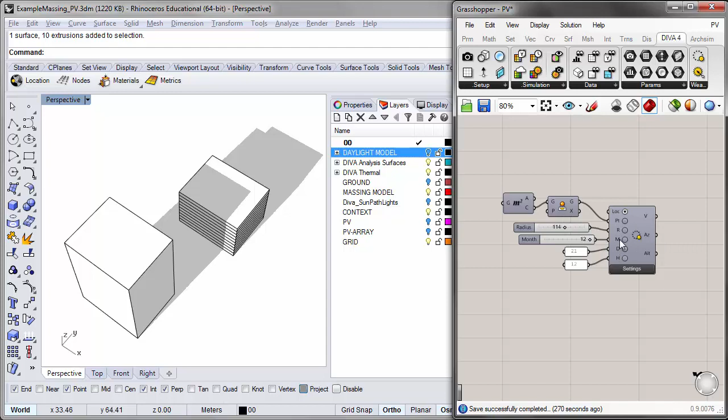We're using the example office Rhino file with the addition of a context building situated to the south of our example office building, which casts a shadow on the roof. We can visualize that shadow using the sun path component you can refer back to in the previous tutorial.

We're showing the worst case scenario shadow being cast at 12 p.m. on December 21st. We'll use the radiation map to show the incident solar radiation falling on our rooftop to get a more quantitative evaluation of where to place a PV panel on that roof.

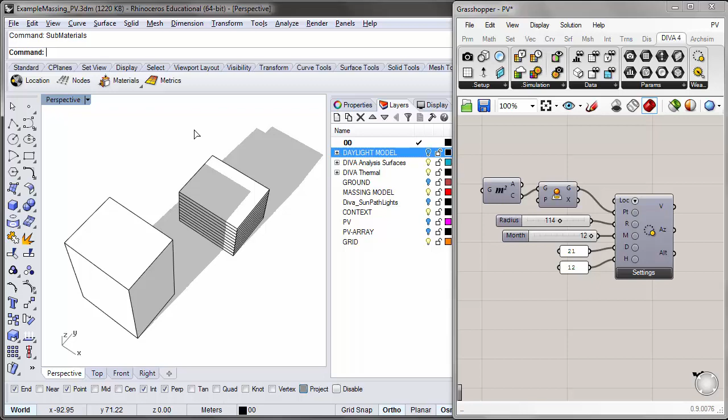We are using the Diva material assignments for this tutorial in Rhino, so you have to have this file set up by setting a location and assigning the materials in the scene. You'll see I already have materials assigned for our context building and for the massing model, which contains our example office, as well as a couple of layers called PV and PV array, which I'll explain further on.

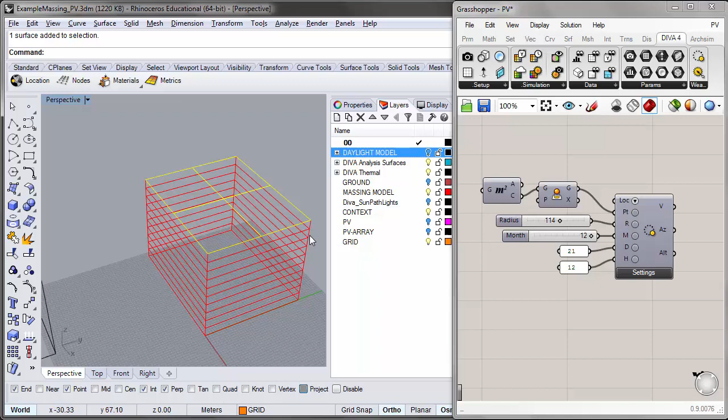This contains the geometry of the photovoltaic panels that we will be testing. I'll switch over to wireframe mode, and you'll see there's a surface modeled on top of our example office building that we'll use to reference for our analysis grid, but we won't be including this in the simulation.

Now to begin, I will place the radiation map component onto the canvas, located here. This component will simulate the total solar radiation falling on a surface, or any kind of input surface, for a given time period.

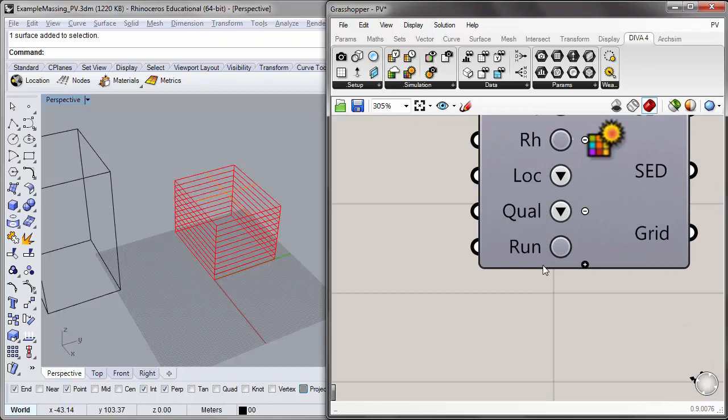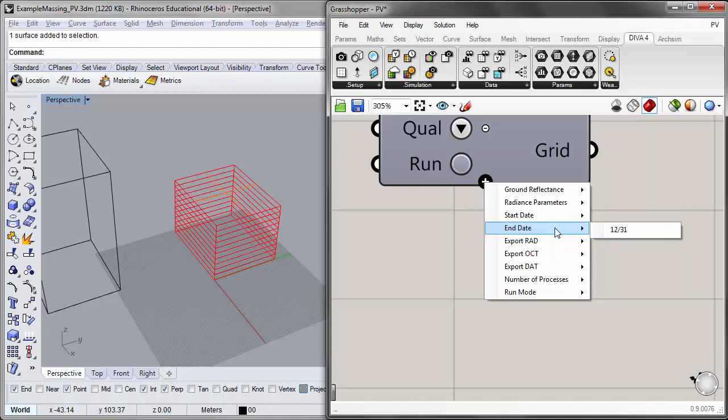That time period can be specified if we zoom in on the hidden inputs. If I press the plus, there's a list of hidden inputs, one of them being the start date, defaulting at January 1st, and an end date input at December 31st. We can override these if we wanted a specific time period, like summer, but for now we want the annual solar radiation incident on our surfaces, so we'll leave the defaults.

We'll give this simulation a name. I'll call it PV, and I'll plug that in here.

Now we need to tell our grasshopper component which surfaces to analyze for solar radiation, for the radiation map. So we'll use the daylight grid input, which is what we used for our annual simulations in previous tutorials.

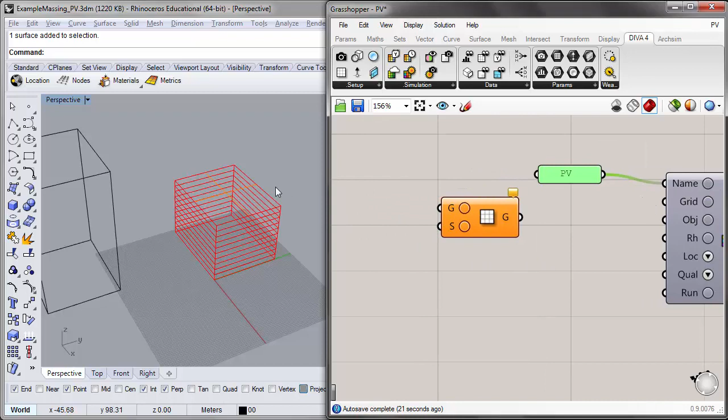For the geometry input, I'm going to reference that surface we want to use for our grid here in the Rhino viewport. I'll place a BREP container onto the canvas and set this surface, which is on the grid layer, as our reference surface for our analysis grid.

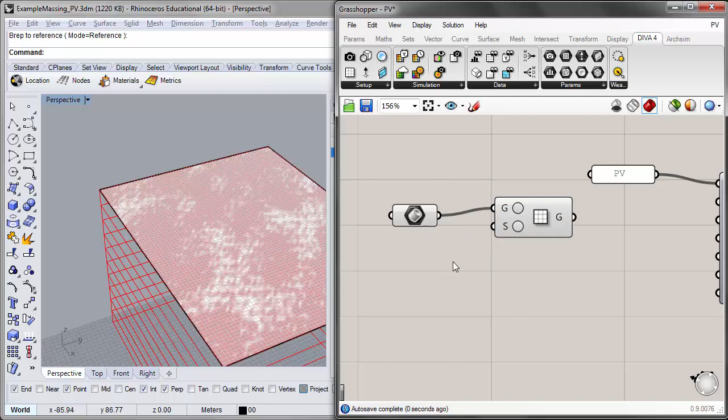And for the spacing, I'll go ahead and leave the default spacing, which is 0.45 meters. I'll plug the grid output into the grid input.

Now for the objects in our scene, as I mentioned, we'll be using the Rhino scene for our simulation, so we won't need to define any additional objects using grasshopper components, leaving this OBJ input blank. For the Rhino scene, I want to include the Rhino scene object, so I'll put a Boolean toggle onto the canvas and set that to true, so now we're including our context object as well as the example office.

For the location, I'm going to keep the default Boston Logan Airport EPW file, and for the quality settings, I'll also use the default low setting. I will place a button on the canvas to run.

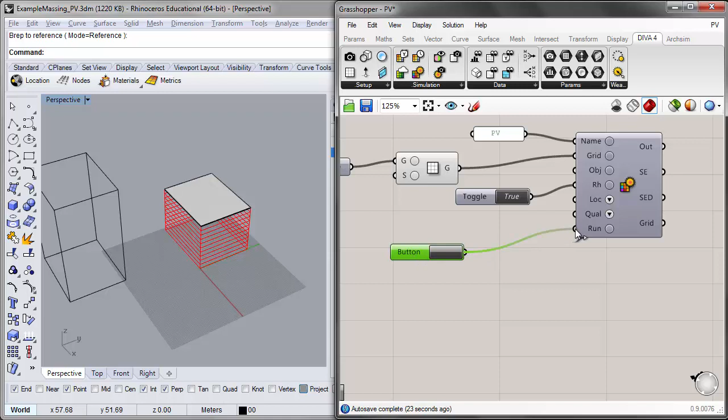So the objective of this first simulation is to just see the solar radiation incident on this roof surface for the entire year, and we'll try to focus in on the effect of overshadowing from this context building to the south.

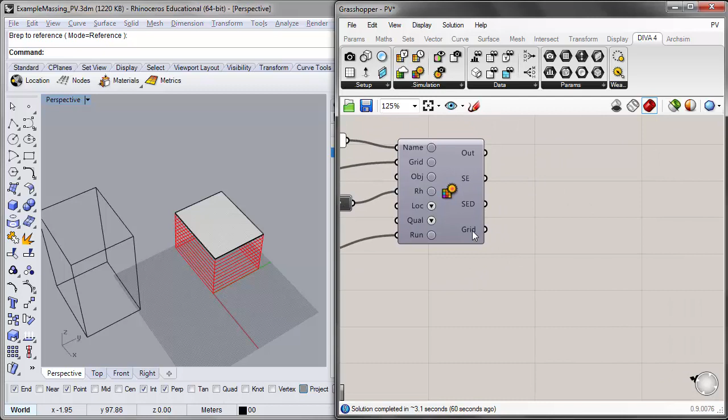Okay, with the simulation complete, we'll utilize the outputs of the radiation map component to visualize our results back into the Rhino viewport. So to start, I will place a grid viewer component onto the canvas, and we can plug the grid output into the grid input.

Now we'll get some results here on our roof, and we can fine-tune these results in order to visualize our solar radiation properly to get a sense of the overshadowing of this context building. You'll see that there is a solar radiant exposure legend here on the bottom, and there's a false color legend from 0 to 1000, and the units are kilowatt hours per meter squared.

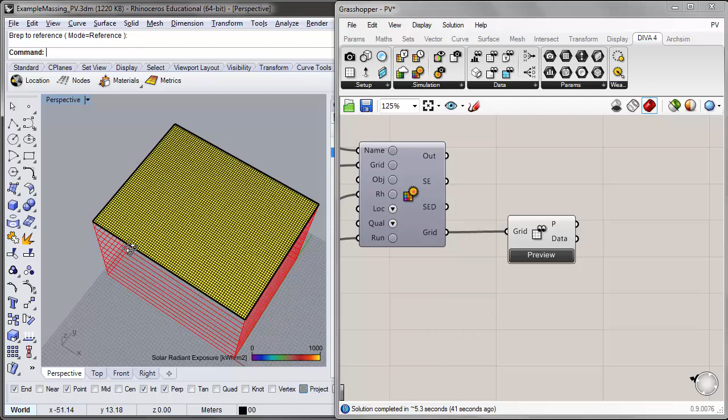We want to increase this maximum solar radiation value so that we can see the full range of solar radiation results to get a sense of the overshadowing. Right now they're all above 1000, so we have a kind of homogeneous yellow results grid.

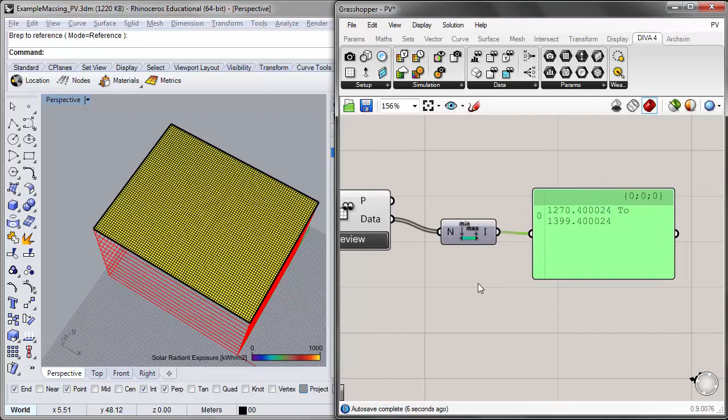We can place a bounds component onto the canvas, which will give us a minimum value and a maximum value for the results. And by plugging the data output into the bounds input, we can quantify the numeric bounds of our result set. So we can see that our results range from about 1,270 kilowatt hours per meter squared all the way up to about 1,400 kilowatt hours per meter squared. So we would need to increase the false color maximum to properly show the full range of results here.

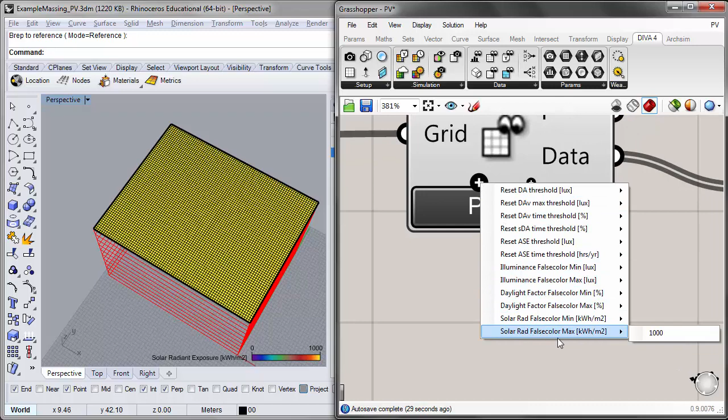So to do that, we will zoom in on the grid viewer component and expose some hidden inputs. One of those is the solar radiation false color maximum. And we can incorporate this now into the component and set this to a higher number. So I'll go ahead and set it to about 1350. And I'll plug this into the solar radiation maximum input.

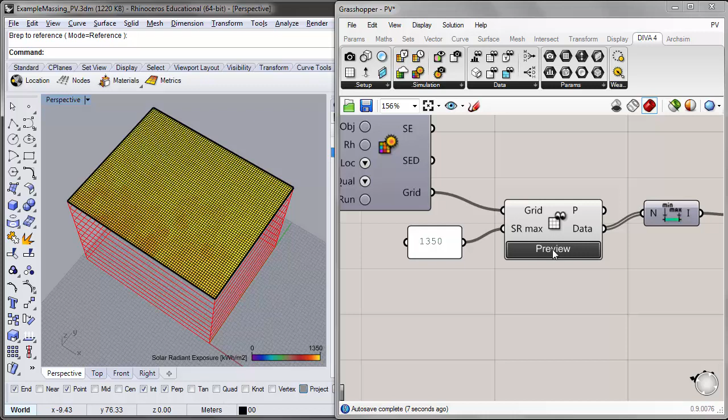We see that something has changed, although the results are a little bit difficult to see because of all the grid wires. So in the preview settings of our grid viewer component, I'll go ahead and turn off the grid wires option, and I'll also turn off the preview of the grid input because that is sort of clouding our results grid. And I will also, for the moment, turn off the grid layer just so we can see our results a little bit more clearly.

So now you can see we have some overshadowing as a result of our context building to the south that's causing some areas of lower solar radiation falling on the roof here to the south. And we have an area of uninhibited solar radiation towards the north of our building. So that's where we'll place our PV panels.

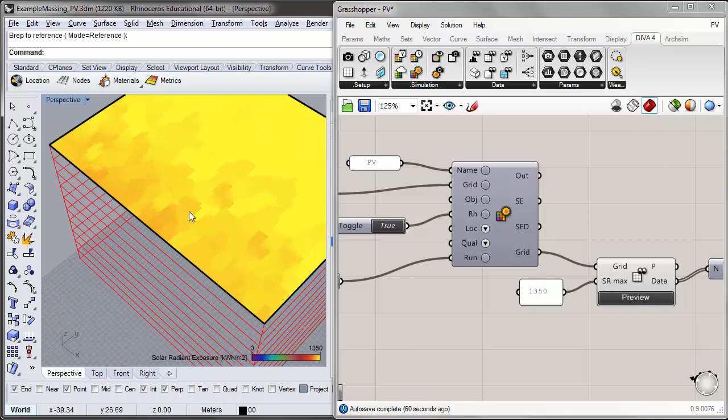If we want to get a more detailed sense of the actual numeric values of the solar radiant exposure on our false color grid, we can zoom in onto the grid and we can turn on in the preview the sensor data here by clicking this option. And now we can see the actual numbers of each sensor in terms of the solar radiation density of each point for the given year.

So now that we know where more or less we can place our PV panels, let's go ahead and run an evaluation on different orientations and rotations of PV panels to see which would be the most optimal rotation. And I've already modeled a few examples of PV panels here on this PV layer. I'll go ahead and turn that on. You see that I have 3 groups of 6 PV panels.

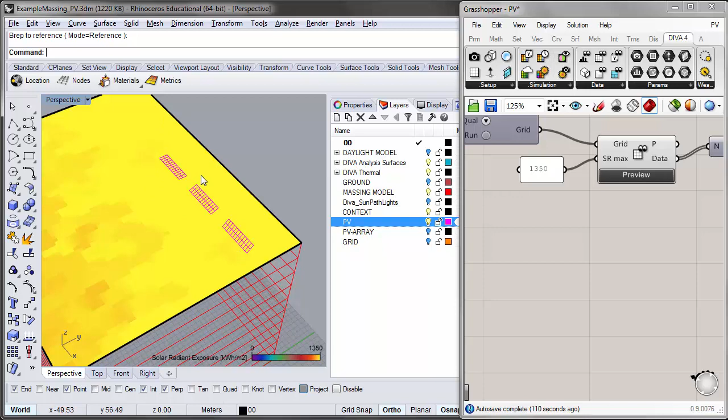I'll go ahead and turn off this preview for the moment. Each PV panel is 1 meter wide by 1.5 meters high. The first group of 6 is on the flat, so it's basically a horizontal set of PV panels. The next group over is a group of PV panels that are rotated 21 degrees from the horizontal. I can just bring in the angular dimension tool to show that 21 degrees.

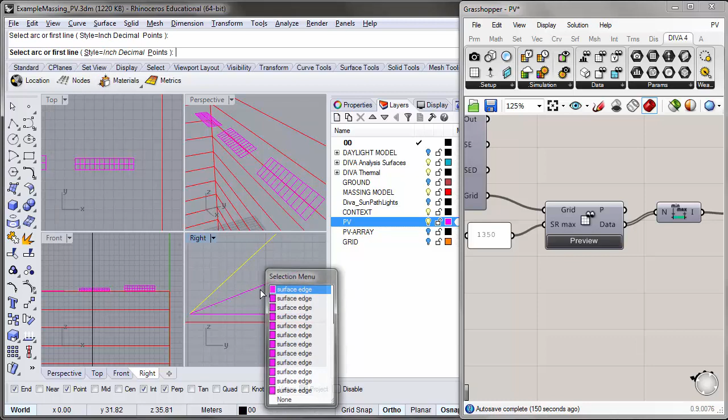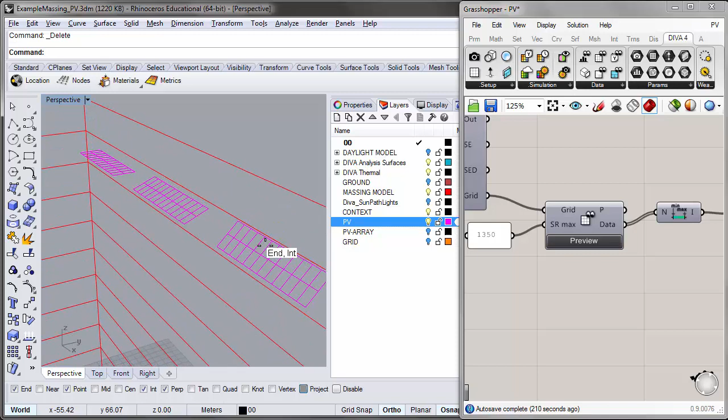And then the last group is this one right here, rotated 42 degrees from the horizontal. And that 42 degrees is significant because I picked it because it's approximately the latitude angle of our Boston climate. That's a kind of rule of thumb for optimizing the amount of solar radiation on a surface. So we have these 3 groups and we can evaluate the amount of solar radiation falling on a typical panel and decide which is the most optimal for our final array.

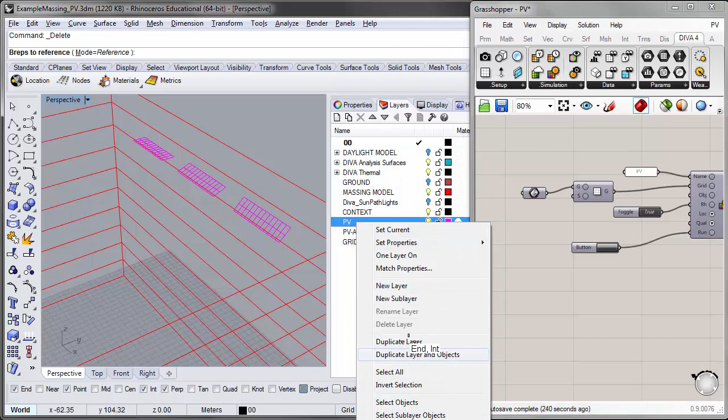To do this, I will modify the selection input here in our grid input. So instead of selecting the roof surface, I'm going to go ahead and select just the PV panels. So I'll set multiple B-reps and I will select all the objects on this layer. So now my grid is corresponding to these different PV panels, and I can now rerun this simulation to evaluate the solar radiation just on those panels. So I'll go ahead and call this PV panels.

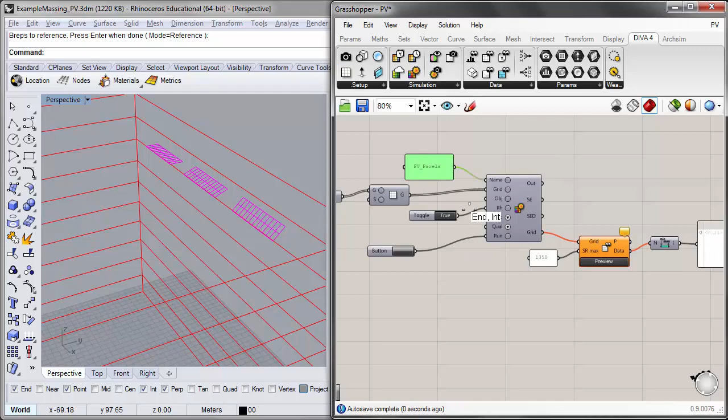When it's complete, I will turn the preview on our grid viewer component, and you can see now that I have turned that on, we have our false color legend as before with our current maximum solar radiation value as 1,350 kilowatt hours per meter squared. And we see the same colored results on our PV panels.

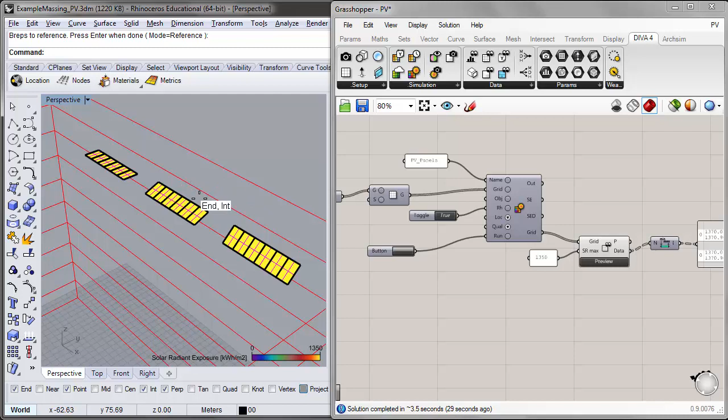As with before, I will modify the maximum value because our results are returning some higher values. So if I scroll down on our list of bounds, we have a tree branch for each PV panel. At the end of the list is the panels that have a higher rotation, and you can see that they have a maximum value of about 1,600. So I want to increase this maximum value to correspond. So I'll go ahead and input that higher number.

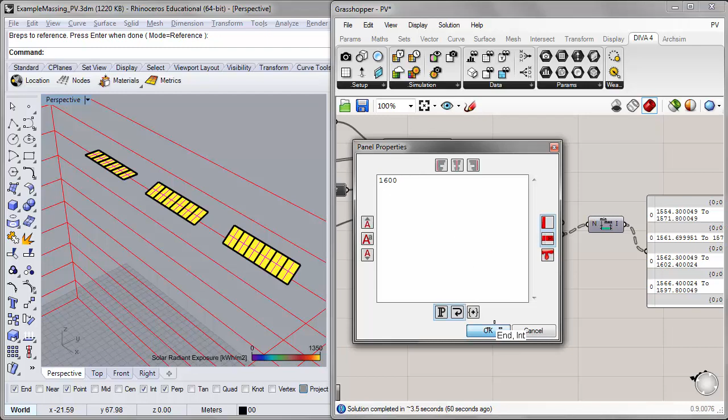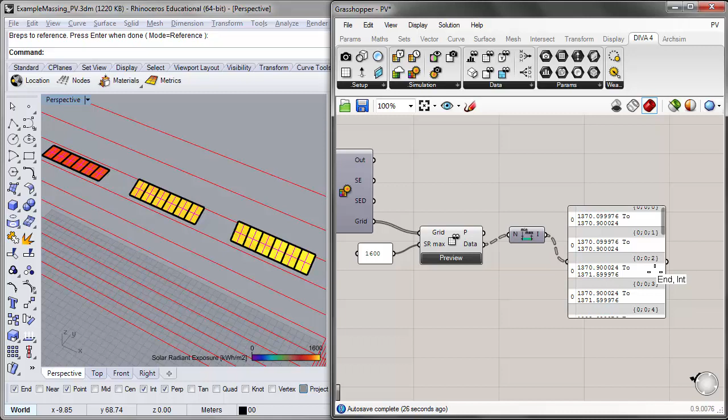So now by increasing the maximum value of solar radiation, we can see now that we have a better sense of the different solar radiation values, the total annual solar radiation on each rotation. So for 0 degrees, we have a value that is at about 1,370. And for the middle one, we have the 21 degrees, about 1,500. And then the 42 degrees, we have about 1,600.

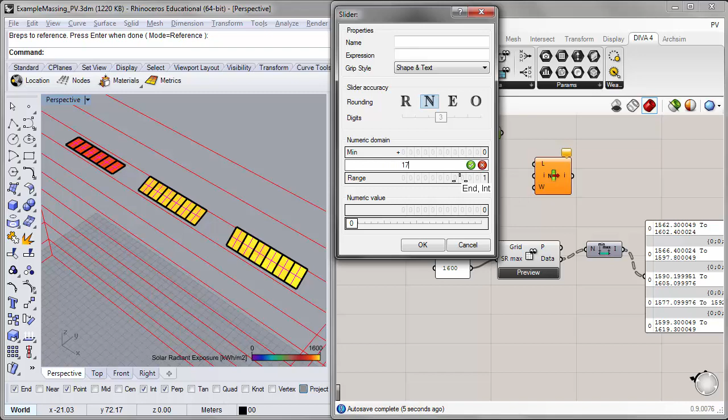To get a better sense of which values correspond to which, we can put in a list item component and a number slider so that we can jog through the index of each grid and highlight each grid at the same time and get the results in terms of the maximum amount of solar energy density. So I will change this maximum to, since we had 18, I'll make that 17. So we have from 0 to 17, 18 values in total.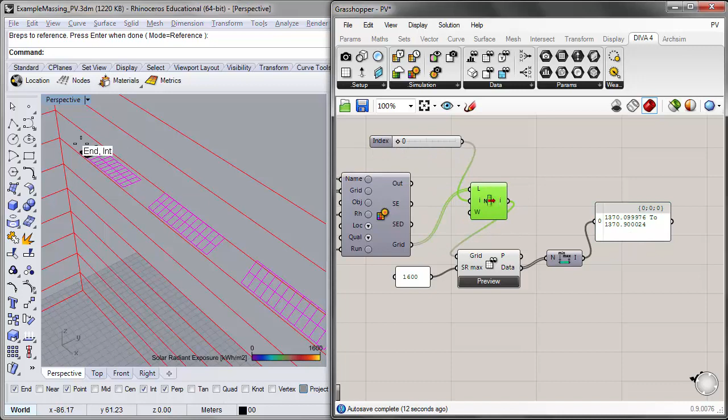And then the list that we want to input is the grid values, and then I'll go ahead and include that here. Now I can scroll through the index here to highlight the panel of interest in our viewport, and then that will also indicate here in this panel the minimum and maximum solar energy density or solar radiant exposure on that panel.

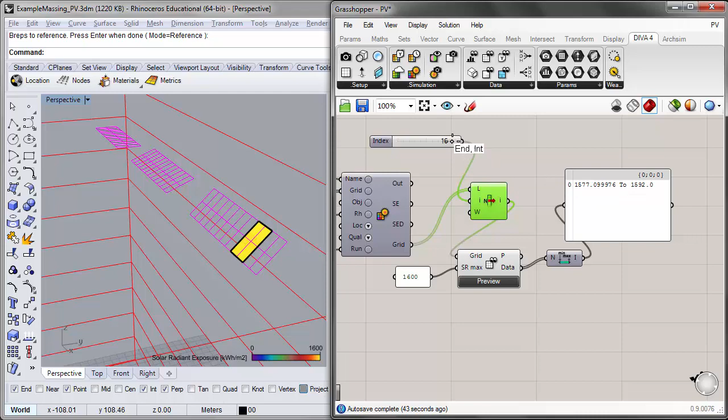So as I'm scrolling through these first 5 entries, these are the flat panels, and they are receiving about 1,370 or so kilowatt hours per meter squared. Now as I move to the next group, the 21 degree rotation is receiving about 1,550 or so kilowatt hours per meter squared. And then moving now to the 42 degree from horizontal rotation panels, you see that the values are a little bit higher, and they range from about 1,590 or so to 1,600. So these panels, the 42 degree panels, are the ones that are receiving the greatest amount of solar radiation over the course of the year.

So I'll go ahead and reset the visualization by just plugging all of the grid outputs back into the grid input. So if we want to move forward with the 42 degree photovoltaic array, we want to see how far the overshadowing of the panels themselves cast onto the roof surface, so we can have a better idea of, if we want 2 rows of photovoltaic panels, how to space those rows.

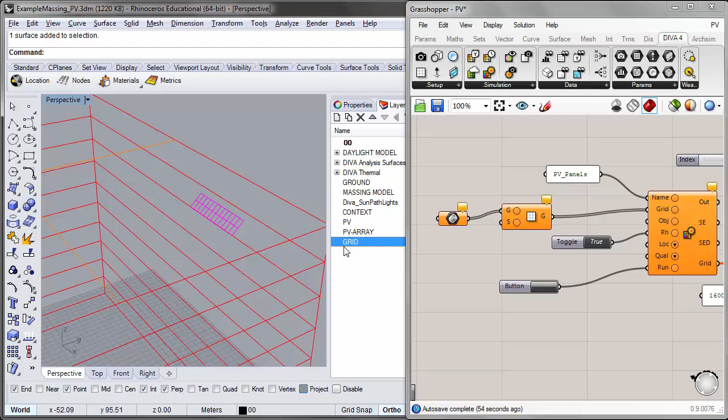In addition to these PV panels, I want also to include the roof surface that we had originally included in our radiation map analysis. For now, I'll just actually erase the horizontal panels and the 21 degree panels so that we can only include in the scene the 42 degree rotation. So before assigning the geometry to the BREP input component, I'll want to change the name of the simulation. I'll go ahead and call this PV panels 42°.

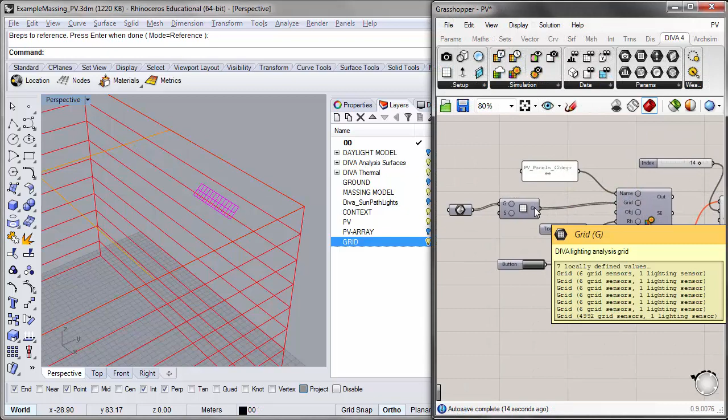And now I can select my reference geometry for the grids. With this geometry selected, you'll see that there are 7 grids, and each grid has a certain number of sensors depending on the size of the grid. And I will go ahead and rerun that simulation.

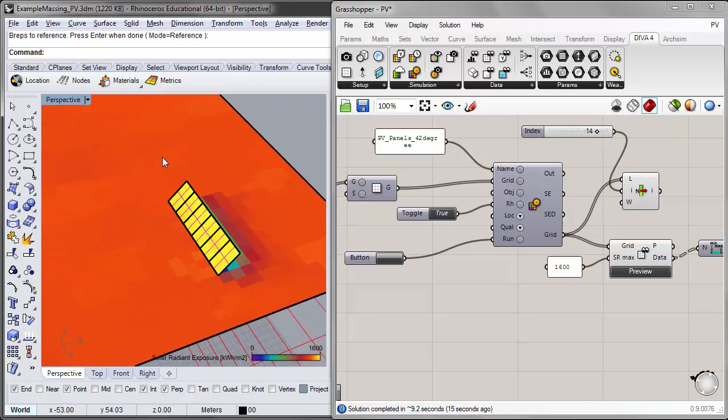Great, now that the simulation has completed, you'll see the results reappear in our viewport, and our maximum value is still at the 1600 kilowatt hours per meter squared value that we wanted to use to visualize the tilted PV panels. But I'll go ahead and set that back to the 1350 value that we were using before to get a better sense of the overshadowing on the roof itself. So this allows us to see the effect of overshadowing of these PV panels on the roof in terms of its influence on the solar radiation on the roof for the whole year.

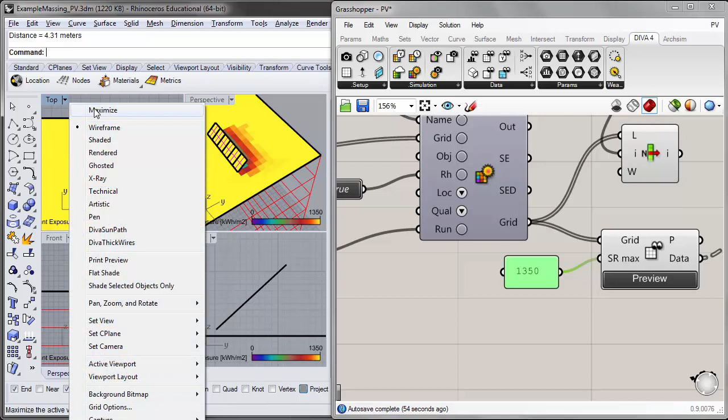And we can see that there is an extension of overshadowing that goes back about 4 meters or so, and I could measure that using the distance tool. And from the base of the PV panel moving upward, looks like it's about 4.3 meters or so. And I can go ahead and select these panels and copy them in that way, so I can make one last test to make sure that there's no overshadowing. So we'll place them about 4.3 meters apart.

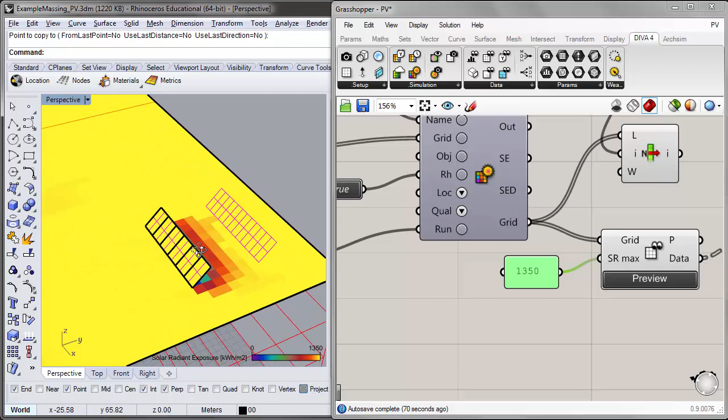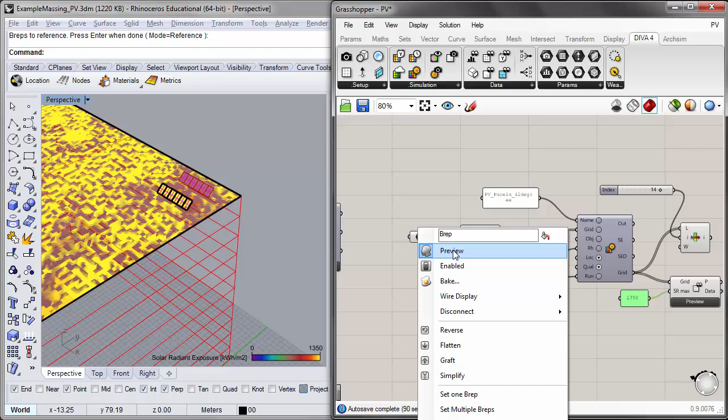And we'll do one more simulation as a test of these 2 rows of PV panels to see the solar radiation on both rows. So I'll modify this selection set and say set multiple BREPs, and I'll go ahead and select these surfaces, making sure I have the right objects selected. And I will run this one more time.

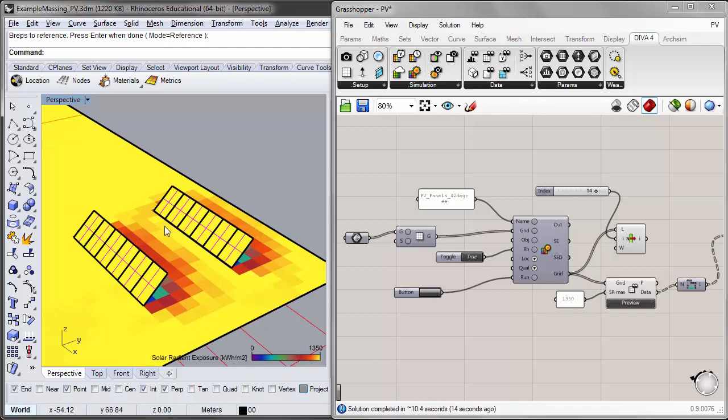So when our simulation is complete, we see now we have both rows being visualized in terms of the radiation map, and it looks like from our general first view that we are okay in terms of overshadowing. I can always increase the maximum solar radiation value on these surfaces to get a closer look.

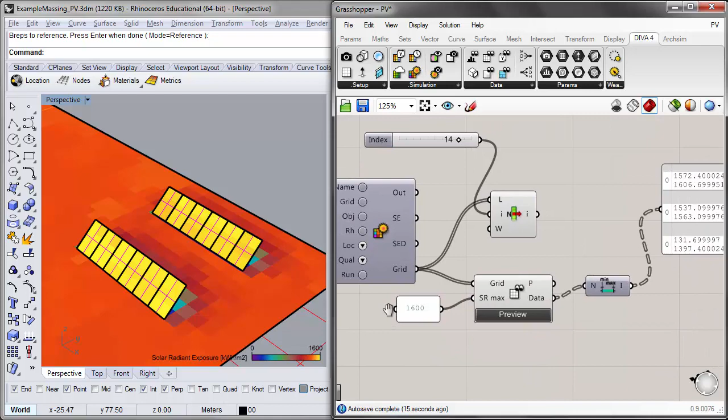We might have a little bit of overshadowing here, and we can fine-tune this by separating and running a couple of other tests to separate them even further, or looking numerically at the values to be sure that we are optimizing our spacing. But for now, I'll go ahead and leave it at this 4.3 meter spacing.

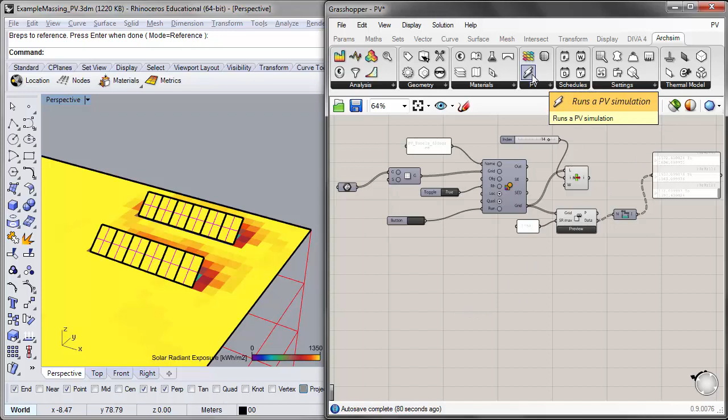Okay, now that we've determined the right place on the roof to place our PV system, and we've optimized the spacing and rotation angle of our panels, we can switch now over to Archsim in order to simulate the electricity produced by our PV system using Energy Plus as our simulation engine. So we can do this by placing the PV component onto the canvas. It's located here.

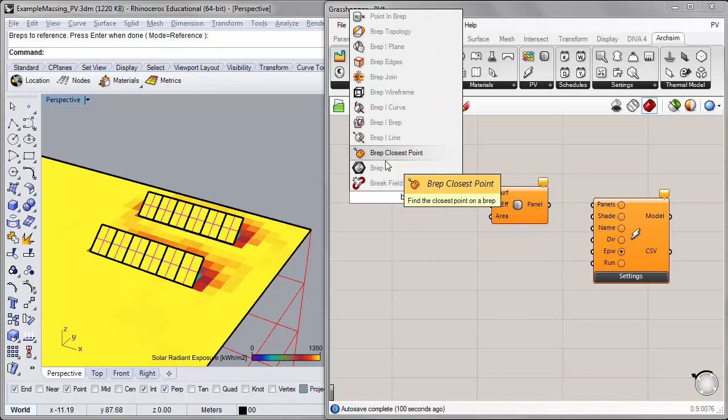And our first input is the panel's input. Now we actually need another component in order to properly input Rhino geometry into the simulation. So we'll place this PV panel component first, and then a BREP component. We'll use the BREP component to reference our PV geometry. And we'll input that PV geometry into the surface input. Now this PV panel component will convert these surfaces into a format that is legible for Energy Plus.

And one of the things that we need to define the performance of these panels is to indicate the efficiency of our PV system. So the default value for the PV efficiency is 15% and is expressed as a fraction, so it's 0.15. That basically means 15% of the solar energy will be converted into electricity. We'll leave that as the default for now.

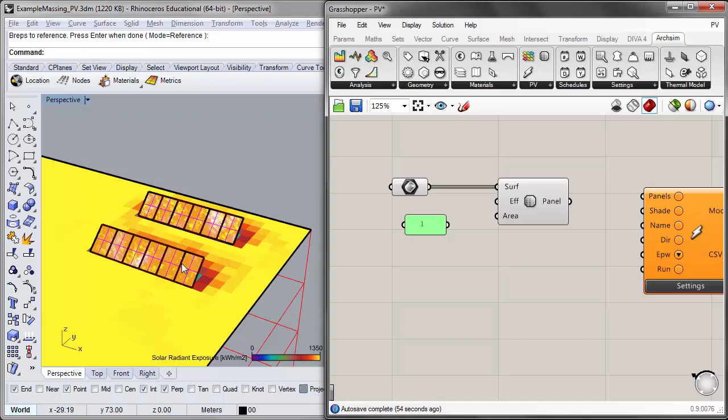And the area, in terms of what part of our surface is actually the effective area for converting solar energy into electricity, the default there is 0.8, but I'll just go ahead and set that to 1. So that means that the panel that we're using, so we have a 1 meter wide by 1.5 meter high PV panel, that entire surface area is used for converting solar energy into electricity. Now we can plug this panel output into the panel input of the PV component.

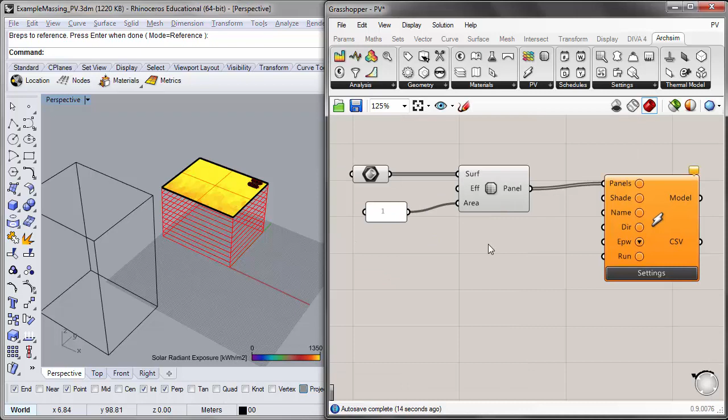Next, it's asking for contextual shading. Now, while we've taken steps to ensure that the neighboring tower isn't overshadowing onto our PV panels, it's probably a good idea to include our context geometry. So I'll go ahead and put another BREP container onto the canvas and set one BREP for our neighboring building. I'll plug that into the simulation. Turn the preview off. Next, we need to give our simulation a name. So I'll call this PV.

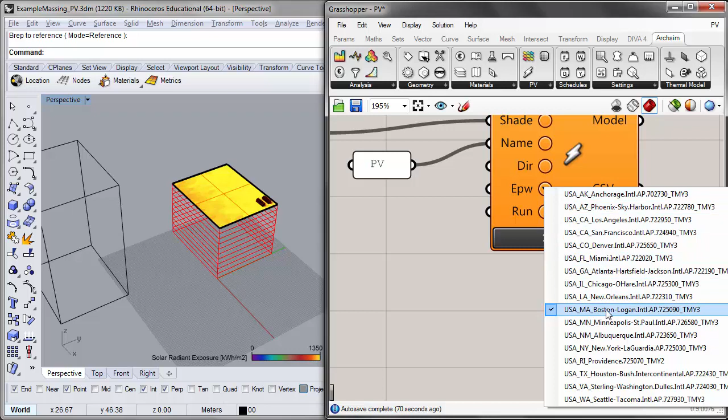The next input is the directory. So this is where we can tell Archsim where to save all of the input and results files for the simulation. And you see that the default is the desktop. So I'll go ahead and leave the defaults for now. Next, we have the EPW file. As with the DIVA simulation components, we need to provide a climate, and so we'll want to be consistent and use the same climate file, and we'll go ahead and keep the Boston Logan Airport EPW file for that.

And to run the simulation, we can place a button on the canvas. Although before I run the simulation, we should take a look at the settings. So this is the place where we can define the run period. So we want to make sure that we keep this as an annual simulation, as we did with the radiation maps. We want to know how much electricity is produced over the whole course of the year. Although we can change this to see how much electricity is produced in the summer or in the winter and things like that. For now, we'll leave it as the defaults, and we'll leave the resolution as monthly so we can see the electricity output for each month of the year.

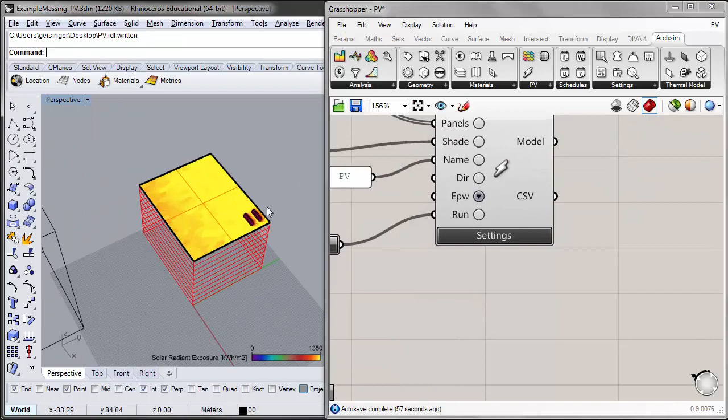And if we scroll down here on the output variables, while we can't change this, it gives us a sense of what the results will be. You see that it's checked by default, generator produced DC electric energy. So that's the result metric that we're going to be getting, and that's going to be expressed in joules. And we'll be getting an output for each PV panel that we input. Okay, so I'll go ahead and run the simulation after we've made these settings.

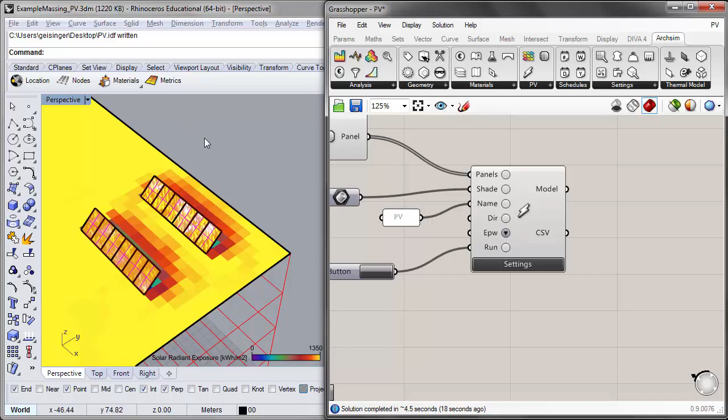Now the results won't be previewed in the Rhino viewport. Rather, we get a CSV output path, and then we have a model output. So the results are actually a set of data that we can visualize back into the Rhino viewport through other components. We can open them up directly in a program like Excel, or we can display the numbers here in the Grasshopper canvas just to get a sense of our solar energy output. So I'll go ahead and do that.

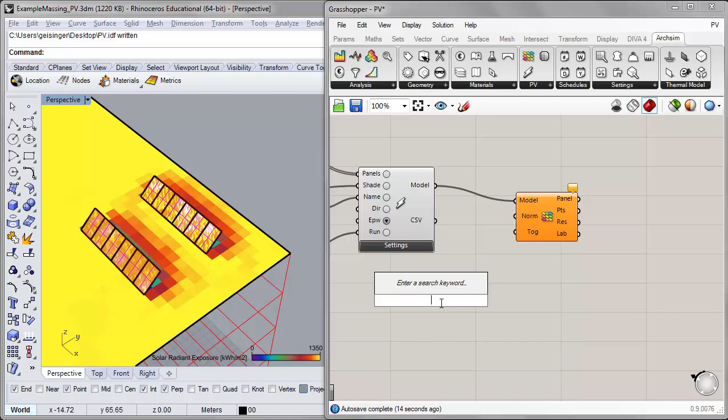And first we need to place this load results file component onto the canvas in order to parse out the results. So to begin, we need to plug the model output into the model input of this component. We have the option to normalize the results over the surface area of each panel, and I'll just leave it as false for now. And the toggle, we need to toggle this as true in order to generate the results. So I'll place a Boolean toggle on the canvas and set that to true.

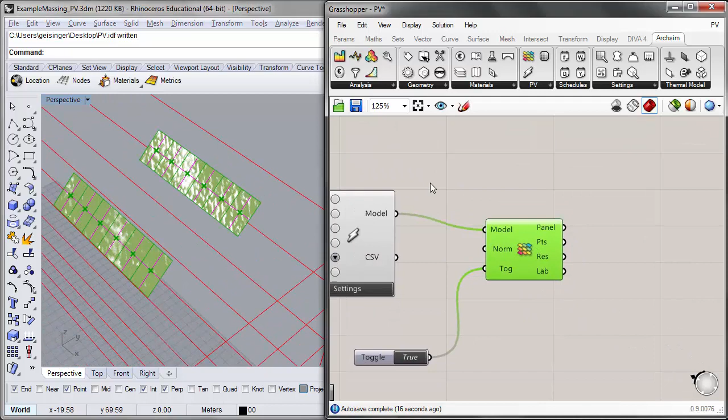You'll see that now we have a preview of our panels here on the Rhino viewport. I'll go ahead and turn the preview off in our Diva grid so we can see this a little more clearly. So these are being previewed. This indicates that these surfaces were in fact input and modeled using EnergyPlus as the simulation engine. And I can now look at the results in the form of a panel.

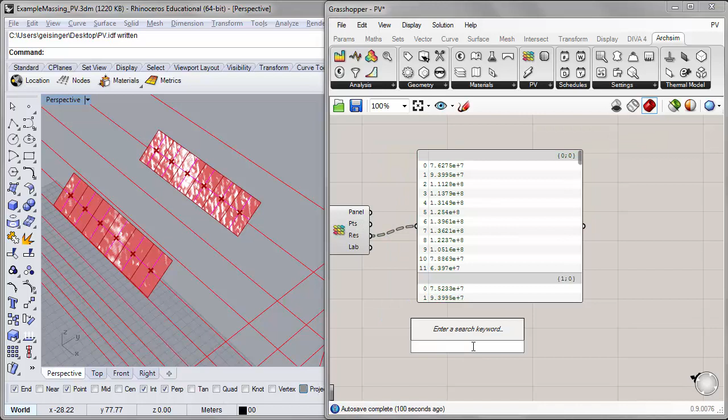So here we have the results. We have a tree that has a branch for each panel, and within each branch is a list of the DC electric energy produced in joules for every month. Now we can just add up all this data by placing a mass addition component onto the canvas. If we were to input this and flatten the results, we can get a total joules value for the entire array. So this tells us what the DC electricity output is for the entire array.

And if I want to express this in kilowatt hours, I can put a division component onto the canvas and divide the joules number by the conversion factor from joules to kilowatt hours, which is 3,600,000. And I can now express this entire output in terms of kilowatt hours. So our total DC electricity energy output is 4,322 kilowatt hours total.

And keep in mind, this is only the ideal DC electricity output for the PV panel array. So it doesn't take into account conversion losses for AC energy or other types of performance losses like residue and other factors. We can further manipulate this data by flipping this tree in order to get a kind of monthly graph. So if I were to just place a flip matrix component here, now we have a branch for each panel and then a list of the 12 months.

But if I were to flip these results, I now have a branch for each month and a list for each panel. So I can add these up using the mass addition component and flattening that to make it into one list. So now you can see that I have a total value for the whole array for each month.

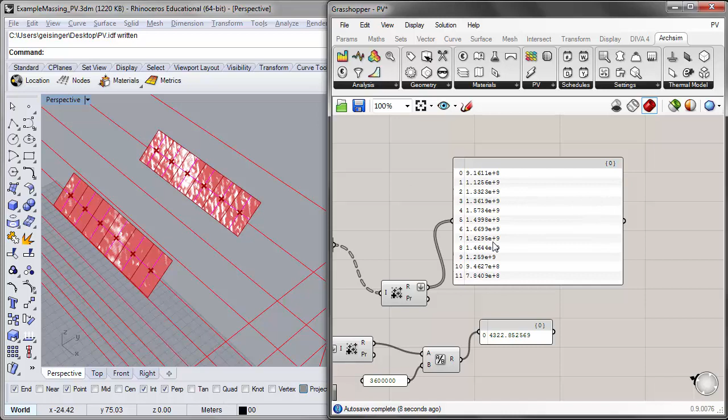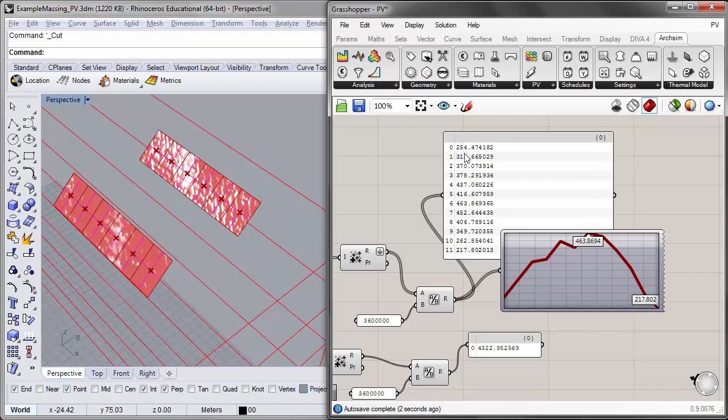So I can take this monthly data into Excel to show this as a monthly graph, or, just to get a quick sense of what the monthly curve looks like, I can plug these results into a quick graph component just to see the monthly results. And if I want to show it in kilowatt hours, I just copied and pasted this division component, and I could plug those results in. And here we can see the results for the months of the year in kilowatt hours.

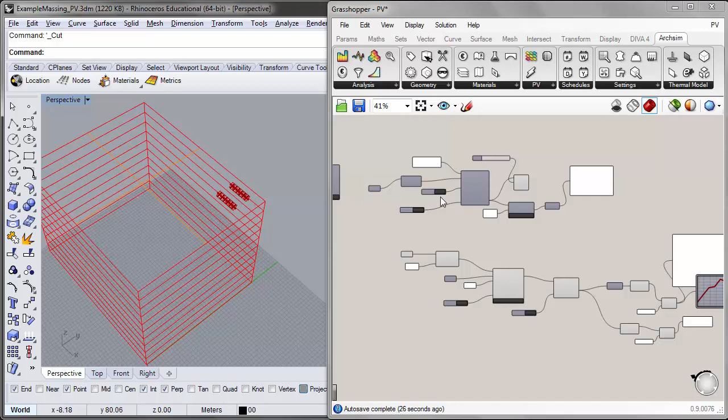All right, that about wraps up this tutorial. We looked at how to evaluate the overshadowing of a rooftop using a radiation map within the Grasshopper canvas, finding the right place for a PV system, optimizing the PV system's rotation and spacing using that radiation map component in Diva, and then taking advantage of the ArchSim PV panel component to figure out what the annual DC electricity output is for that system. Thanks a lot, and I hope you join us for the next tutorial.